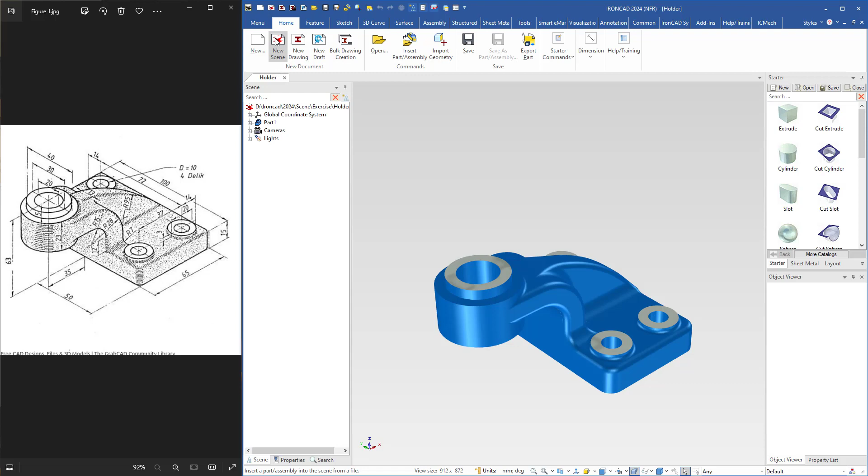In this exercise I'm going to create this holder. It will look like this when it's finished, and we have the drawing here with the dimensions. So I will start a new scene, and I will begin by making this bottom plate.

Drag an extrude shape, drop it here, and the size is 65 by 100. So I type 65, and then here's 100, and the thickness is 15, like so.

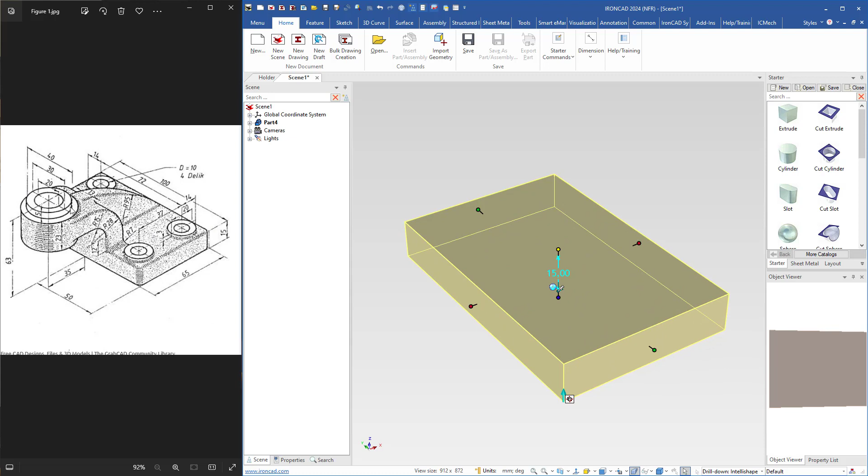And then I will create this part, the cylinder. So I will drag a cylinder, drop it here on the midpoint, and the diameter is 40, and I think this one is already 40, yes, and the thickness is 23, like so. And then I will add this part here, this cylinder,

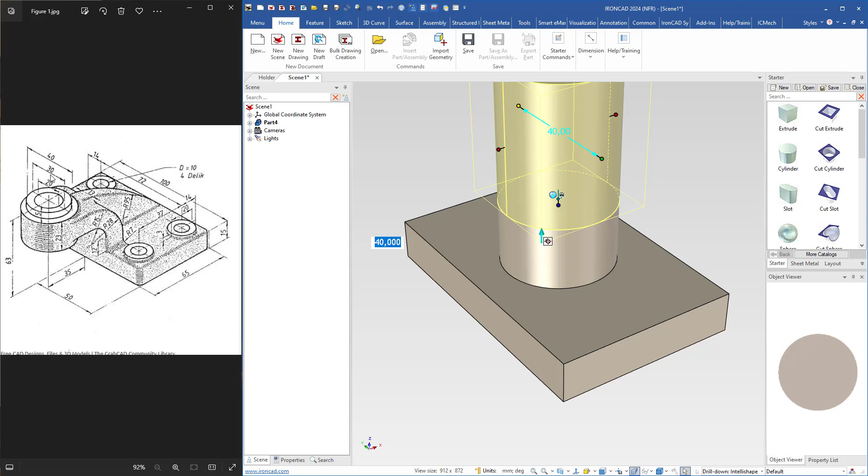drag another cylinder, drop it on the center point. That one has a diameter of 30, so I will type 30, and the thickness is 5.

Then I select this one in TriBall shape level, select it first, and then shift select the other. We have to move it a bit. And I select the big one first, because when I activate TriBall, the TriBall will be placed at the center of the first one.

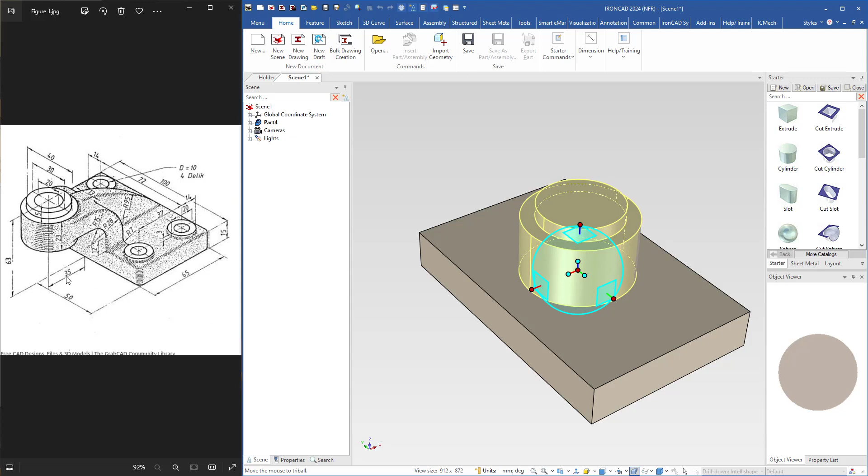So we see that the position of this part here is 63 from the bottom to the top, and it's 35 from this edge to the center here. So I have to move the TriBall, unlock it, right click the center handle to center point of this one, like so. Then right click this handle and choose edit distance from the bottom.

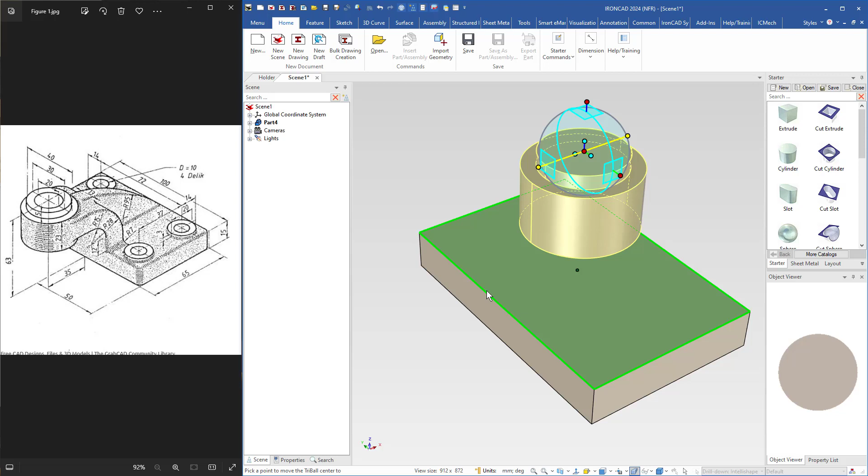That's 63. Then I select that axis and right click, select 2 point, this one, the edge. Now I can change the distance here by dragging this axis or the handle and then let it go and type 35. So now it is in the right position, like so.

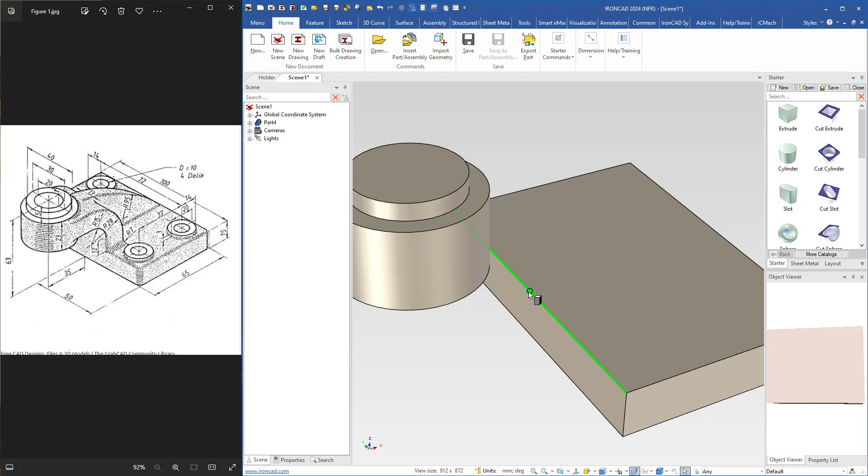Then I will add this part here. I will use block. I will use extrude shape, and I will drag an extrude shape and drop it here on the midpoint. Grab this handle, snap it to this side, and the thickness is the difference between radius 15 and radius 28,

and that's 13. So we'll select this handle, type 13, and the height, we have 12 here, and then we have the radius, so 12 plus 15, that's 27.

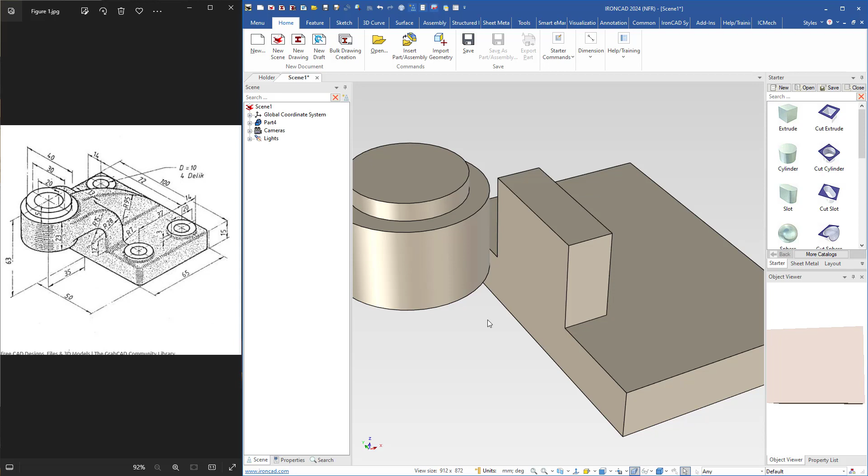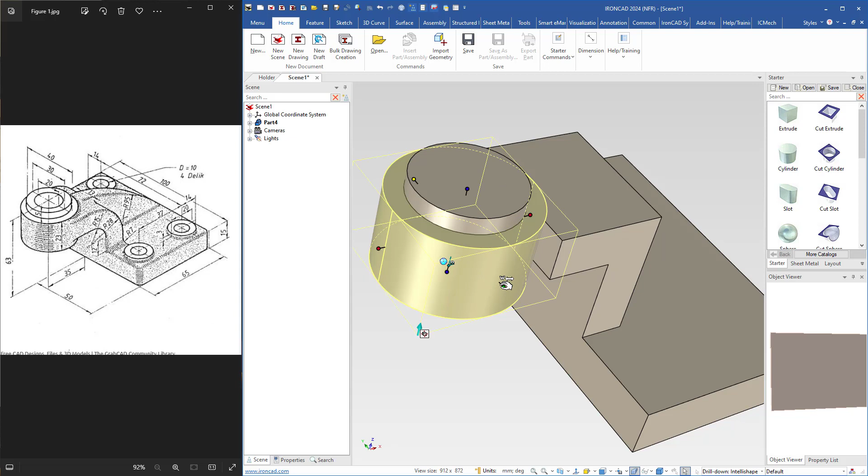Then I will add another extrude shape, drop it here on the top, and I will grab that handle, snap it to that side, the same thickness, the blue handle, 13. Make sure that this one is 40, because the cylinder is 40, and we see that it will have the same width as the diameter.

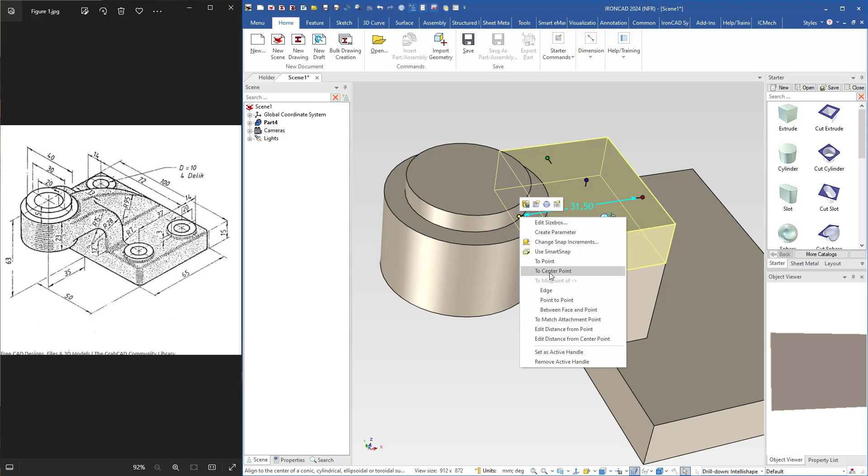So that means I have to right click and drag and snap it to the side here of this cylinder so that it will have the same distance as the diameter. So I have to do the same with this one. Right click and drag, snap it to the side here. So now I will select this part here, right click, and choose to center point of this cylinder, like so.

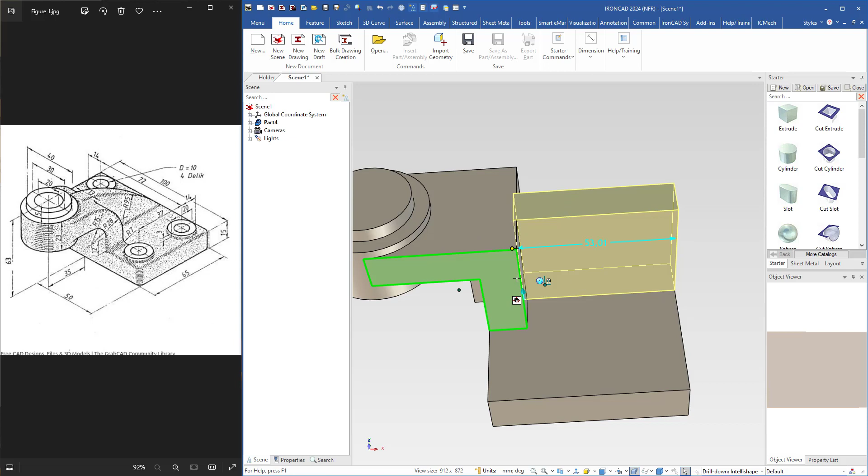Then I will add this one, grab an extrude shape, drop it here, and the thickness is 13, so I will right click, hold and push and type 13, and I will snap to this side here and to the top, and this one will go to this side, like so.

Now I will add some fillets. First this one, 15. So I select the part, press S on the keyboard, choose blend edges, select this edge here. That one will be 15, so I will type 15 and hit enter. And then I will select this one and type 28.

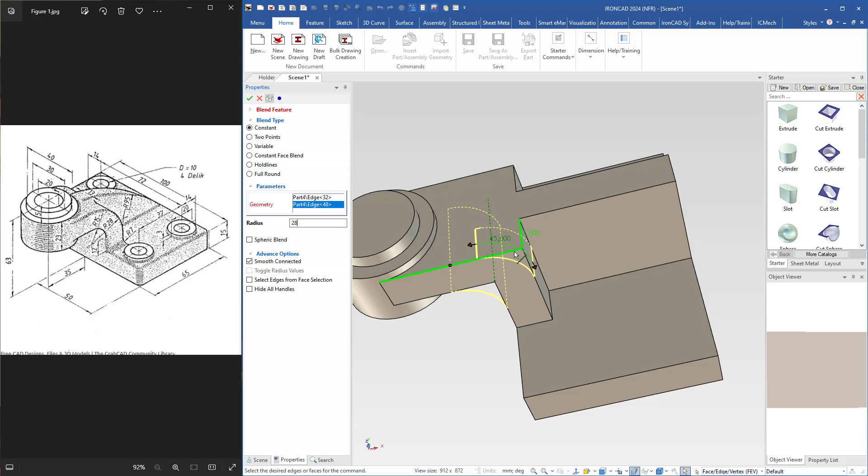Let's see now, 28. And do the same here. Select it. Then I hit enter. So it will look like this. So now I will add a blend here as well. We see that this blend will stop here at this level on this edge.

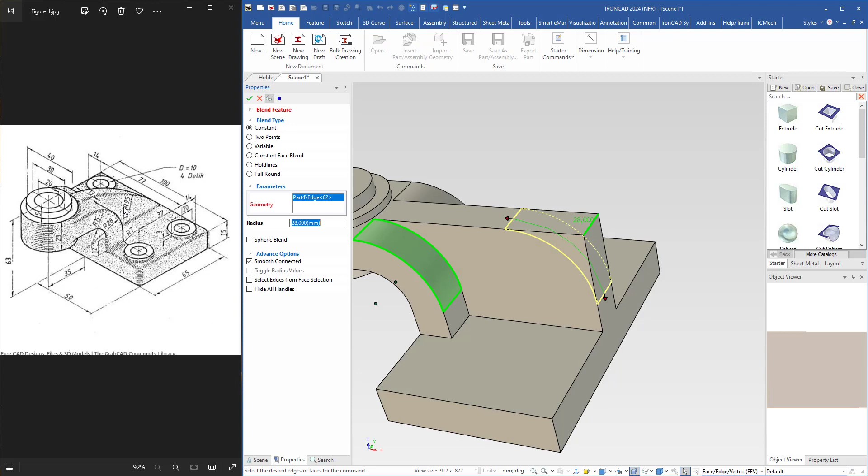So if I now select blend here, select this edge, and that blend has a radius of 95. So I will type 95 and hit enter. So we see that this blend or fillet will affect the bottom plate, but I don't want that. I want it to stop here at this edge here. So how will I fix that?

Well, if we come over to the scene browser, we see that this is the block, the bottom plate. If I now drag the block to the bottom, the fillet will not affect the bottom plate. So this is how I want it.

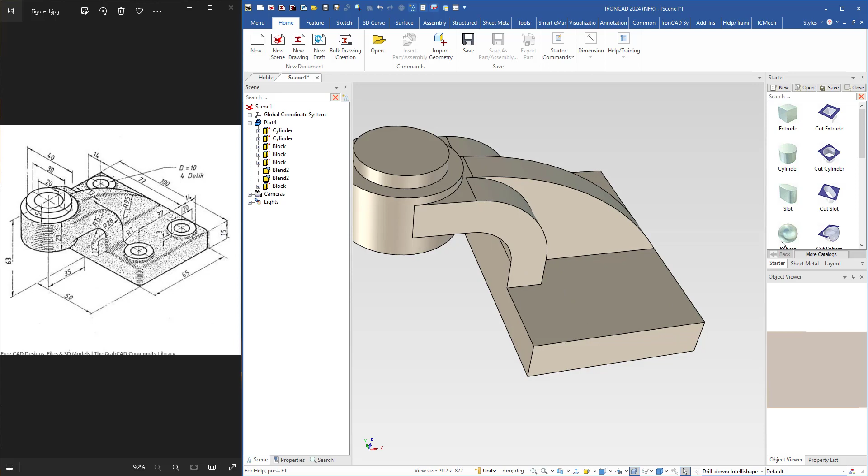And then I will add these cylinders. I will drag a cylinder, drop it here. The diameter is 20, thickness is 3, and it's 14 from the sides. So this one is 40 right now, but I will type 20, hit enter. Thickness is 3. Then I will use the triball to get the right distance from the sides.

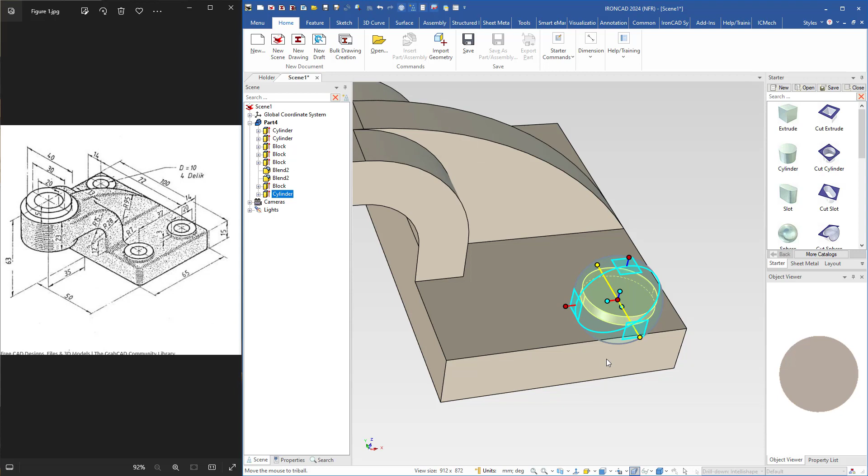Edit distance from this side is 14. Then I will select this axis, right click. Edit distance from this side is also 14. And then I will copy this one. I need 3 more. So I will move the triball to the midpoint of this edge. Then lock the triball, right click.

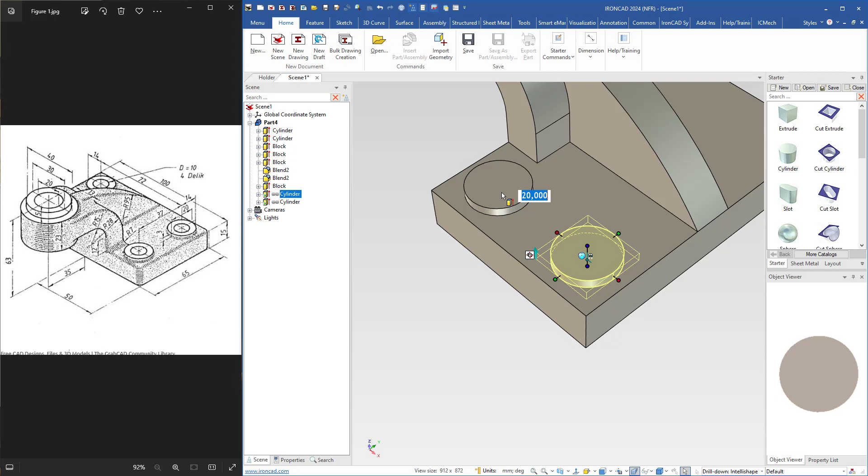I think I have to move the camera a bit. Right click, mirror and link. Then I will select that one, turn on the triball and move the triball to midpoint of this edge. Lock the triball, right click, mirror and link. So now we have 4 of them.

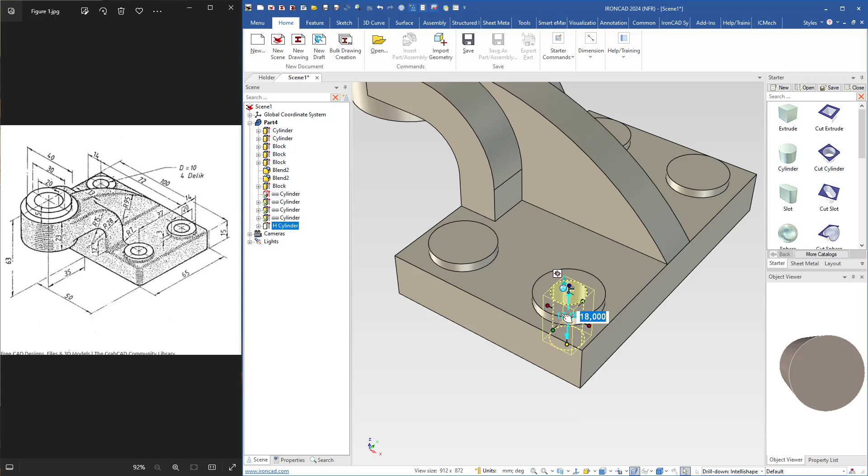Then I will also cut a hole in the center. Use cut cylinder, and the diameter is 10. So we'll select that handle, type 10, and it will go through the part. Then I turn on the triball and right click the center handle, and here I will choose create multiple copies or links, and I will use this option using cursor. So now I can select the midpoint and it will cut holes like so. Then I turn off the triball.

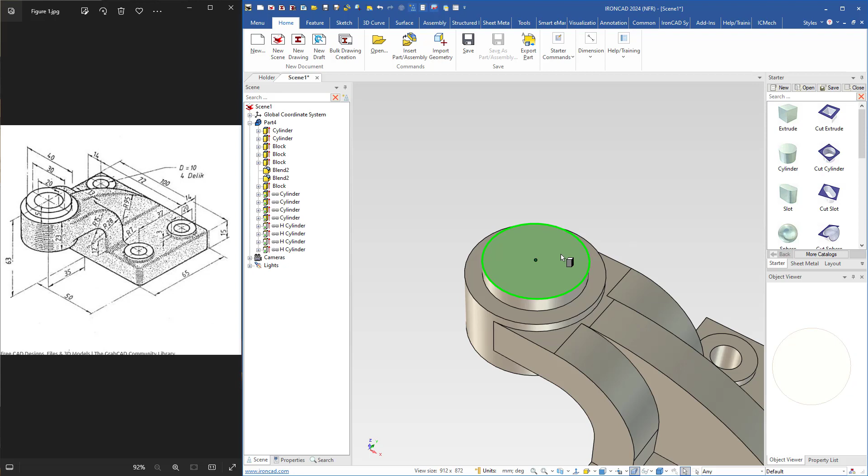I will also cut a hole here, so I will use a cut cylinder, drop it here, and the diameter is 20. Let's see now. I select that one, and it will go through the part, or this part here, like so. And then I will add some blends.

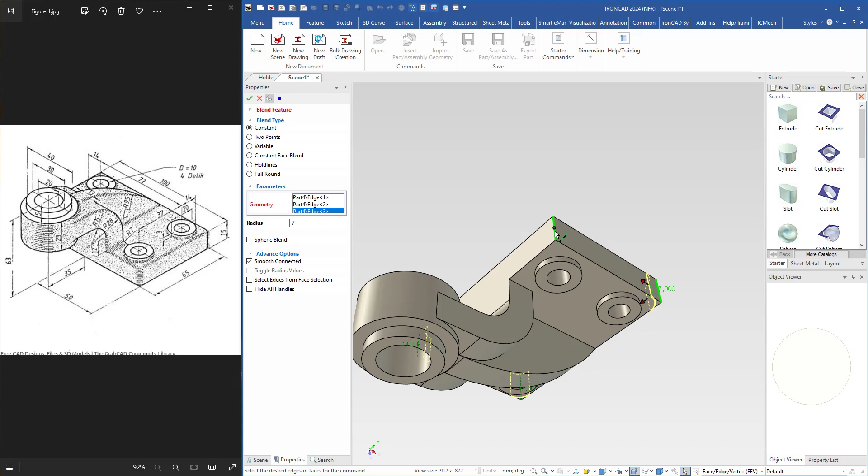Select the part, press S on the keyboard, select blend edges, and I will begin with these edges here. It's too big, so here I will type 7 and hit enter. Choose that one as well, that one, and this one. Hit enter, and I will continue to add blends.

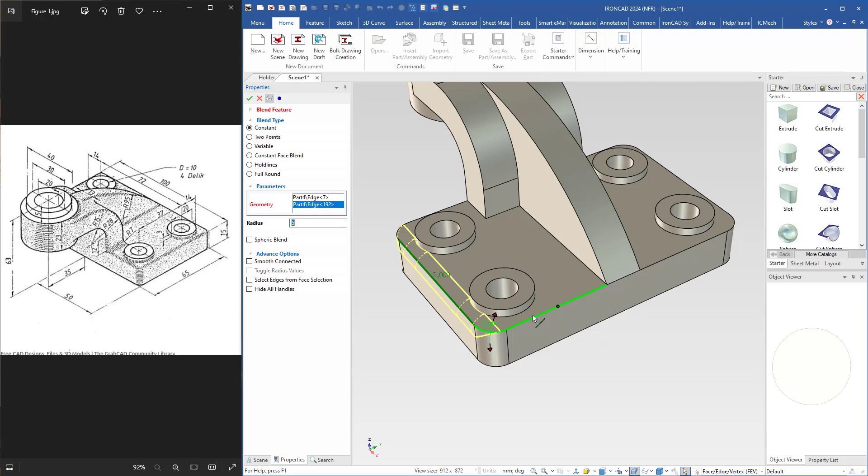Sometimes when you add blends, you have to take it step by step, or you can also use smooth connected. I think I will add a blend of 5 millimeters on this edge here. So I will type 5. If I now use smooth connected and select this edge, we see that it will add a blend here, but I don't want that. So sometimes you have to uncheck smooth connected. It will be easier to select the edges you want to add a blend.

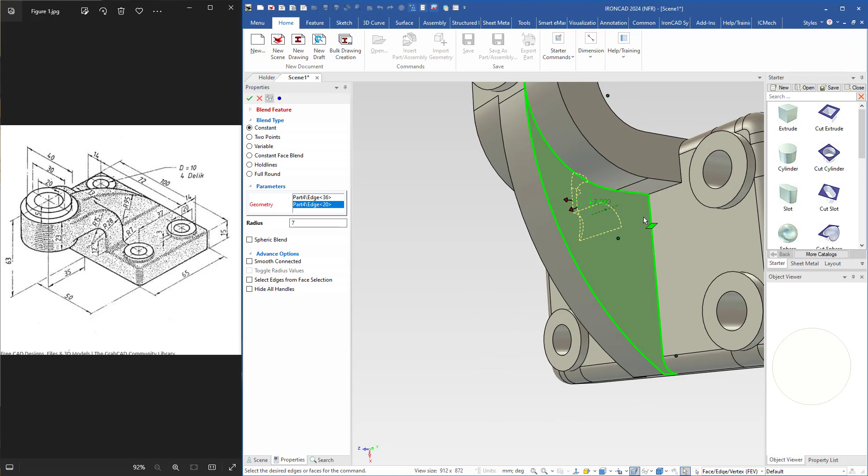So, and I will also select this one. Now I will hit enter, and we see this fillet or blend should be 7. So I select the part, press S. Here I type 7, select this edge and that one. Do the same here. Hit enter.

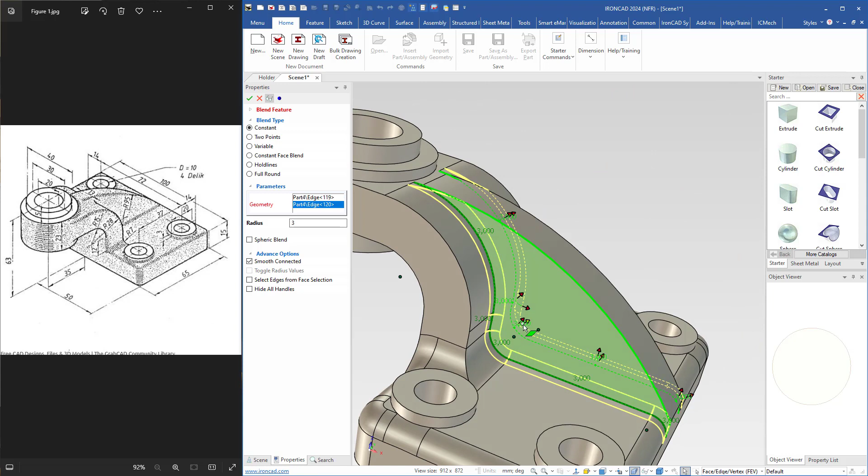And then I continue by adding blend. I'll select the part first, choose blend. Now I will use 3 millimeters. And now I will select this one here, see how it works. Perhaps I can use smooth connected here, and that works. Do the same here. And I will also use 3 here and here. And on this side and here. Then I hit enter.

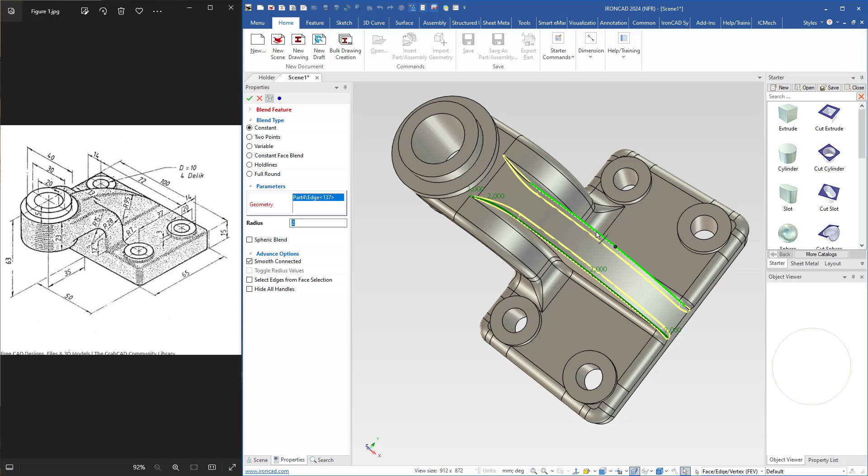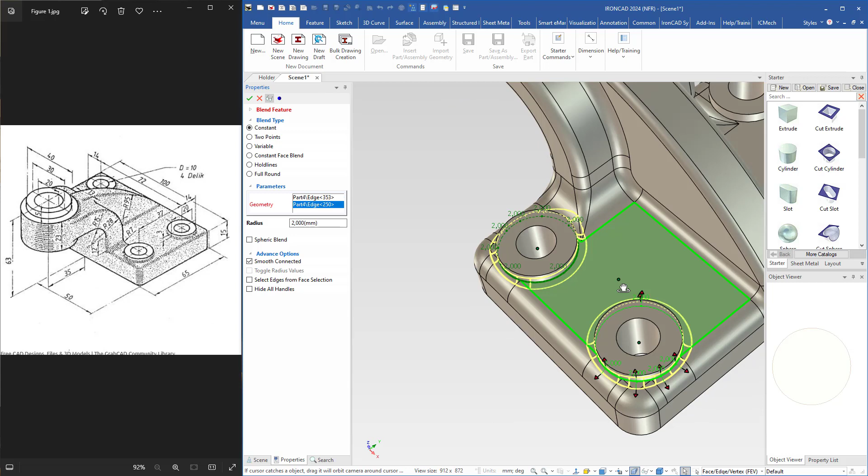And I think I will use 2 millimeters here. So I will select the part again, use blend 2 millimeters, select this edge and this one, hit enter again. Now we need some blend here around these cylinders. Select blend, select this edge here. Sometimes it might not work like this one. So let's see now. Yes, it worked. Like so, and this one as well.

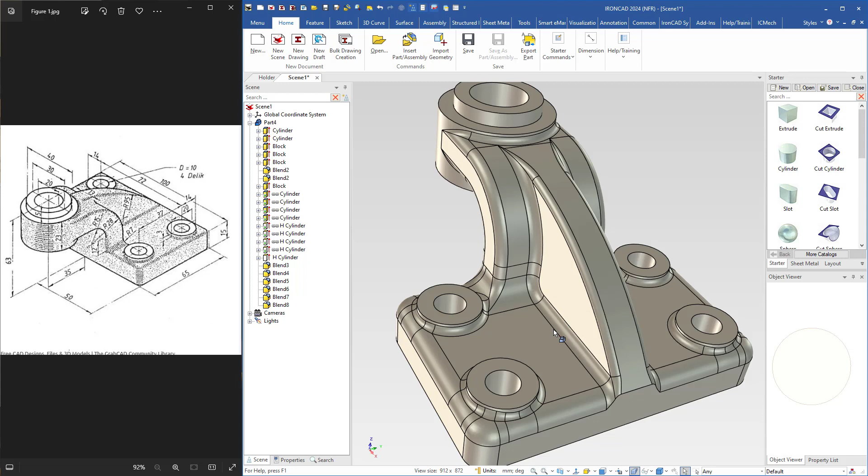And we need a couple of blends here as well. Like so. Then I hit enter. So I think I have added blends where they should be. So this is how you can create this type of holder just by using the drag and drop method.